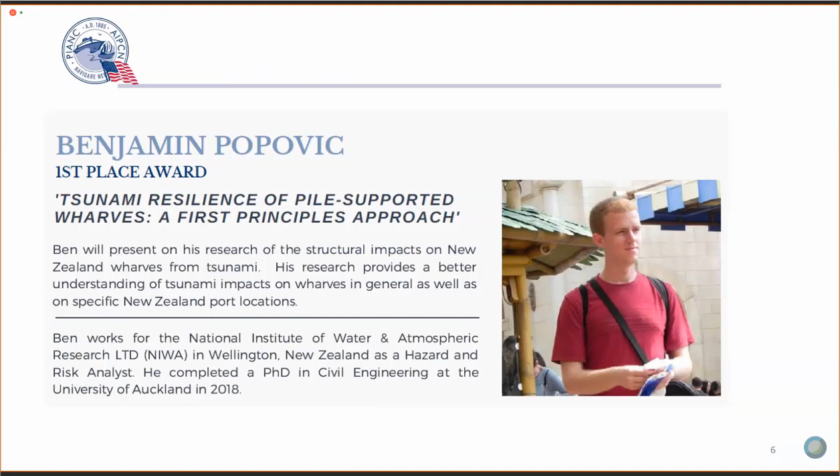And so we'll get the first presenter going here, Mr. Benjamin Popovic. He's currently living in New Zealand, but is originally from New Jersey, so we're claiming him as an American for this - New Zealand may want to claim him too. Ben works for the National Institute of Water and Atmospheric Research in Wellington, New Zealand as a hazard and risk analyst, and he completed a PhD in civil engineering at the University of Auckland in 2018. He will present on tsunami resilience of piers.

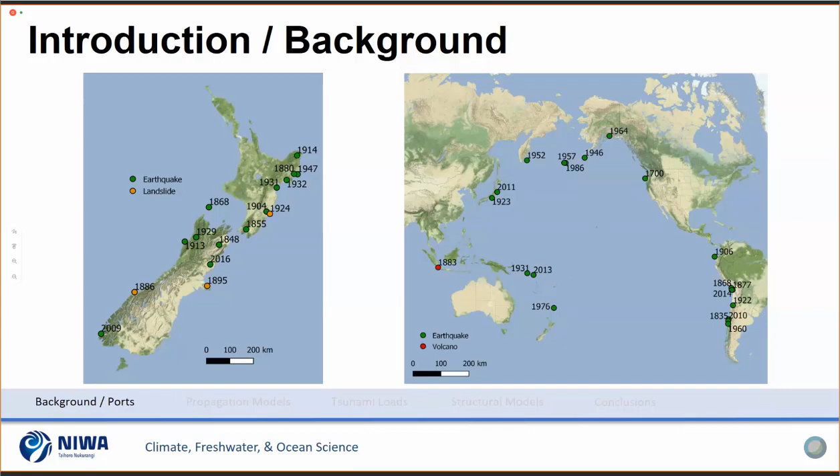This work was carried out in a number of different phases, and they can really be categorized into two pipelines. The first pipeline focuses on the tsunami hazards themselves, meaning a series of hydrodynamic modeling meant to come up with potential wave amplitudes and current velocities and whatnot specifically at the port locations. That information translates into loading characteristics, both in terms of magnitudes and time series that they would be applied to infrastructure over.

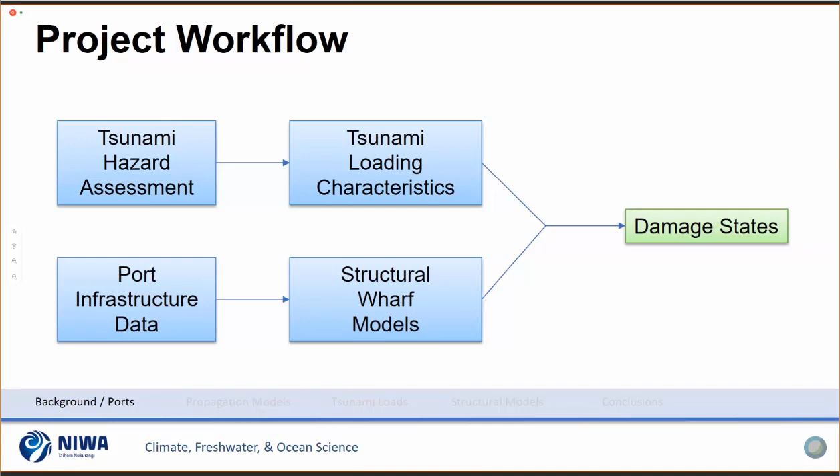The second pipeline relates to the infrastructure itself, meaning collecting as much data as we can on what sorts of structures currently exist at the ports. Sometimes that information is quite sparse because some of the infrastructure dates back quite a ways and is quite old on some sites. Then from the data collected from the ports, we developed structural models, and the tsunami loading characteristics were applied to those structural models, and we came up with predictive damage states for such events. I'll talk a little bit more about each of those different phases later on.

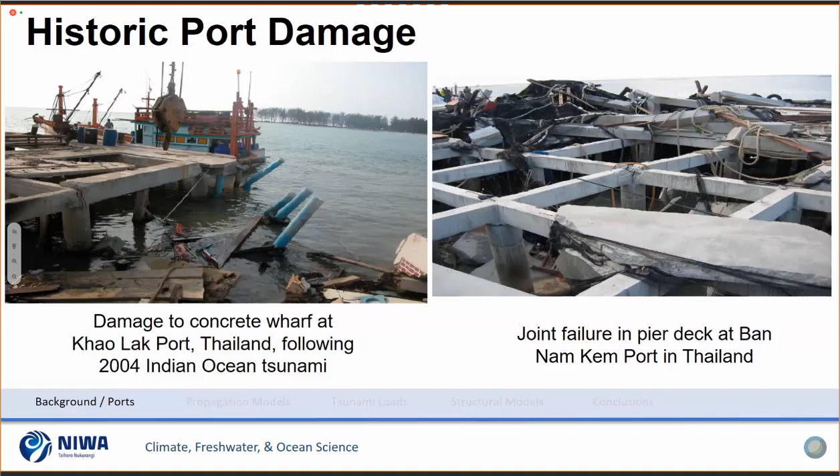I should point out Thailand is obviously a very different country than New Zealand, Japan, or the United States. Structural design standards in different countries are going to be very different, so we'd expect structures to respond quite differently depending on the country. But it's still useful to look overseas when that's the only data available, to gain some indicative idea of the modes of damage we'd expect to see in these sorts of events.

The port is built on reclamations that date back, in some cases, over a century. It's interesting because it's not just the port that's built on the reclamations, it's actually the entire downtown area of the city. If you look at maps of Wellington that date back to the 1800s, basically everything is underwater.

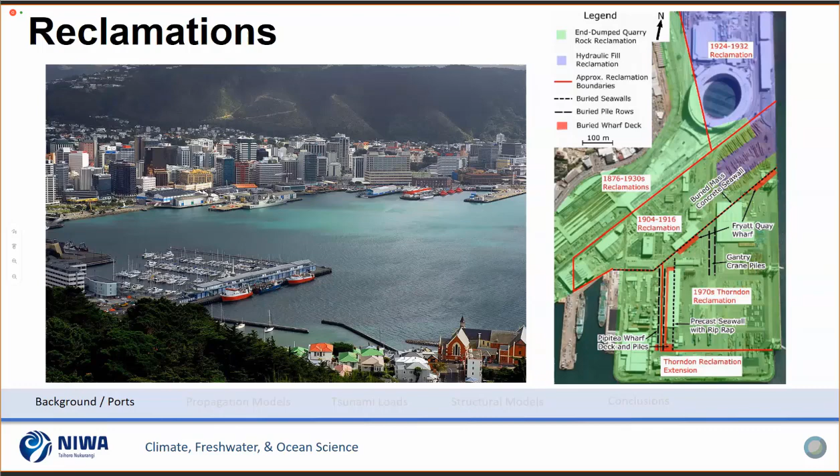And now everything is built up with skyscrapers and whatnot. And that has led to issues in hazard events in the past.

So in 2016, there was a major earthquake, about a 7.8 moment magnitude earthquake on the northern end of the South Island in a town called Kaikoura. And Wellington isn't that far away from that by distance. The earthquake caused settlements of the soil right behind the wharves, and that land dropped by between 2/3 of a meter and a meter, so about 3 feet, behind the wharves.

And although this is earthquakes, tsunamis can also do a lot of damage to the soil because of the turbulent nature of the tsunamis. So if it's not compacted well, you could see similar damage from tsunamis as well as from earthquakes. So that's certainly an issue that New Zealand may face in the future with the reclaimed land.

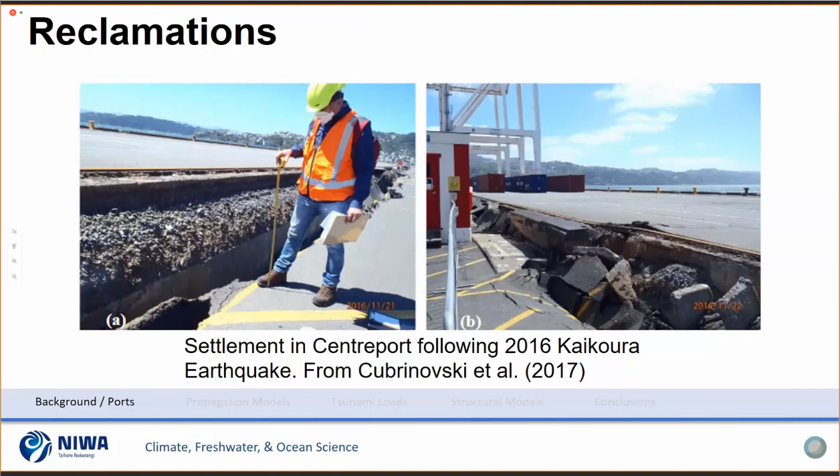So what do we know about tsunamis in New Zealand? This is really focused specifically on New Zealand. There have been a number of national tsunami assessments that have been done, but like in other places, national assessments are usually done on a very coarse scale. For New Zealand, the most recent national tsunami assessment was done back in 2013, at least the major one. And the issue with that is that tsunamis were modeled on 20-kilometer intervals along the coastline.

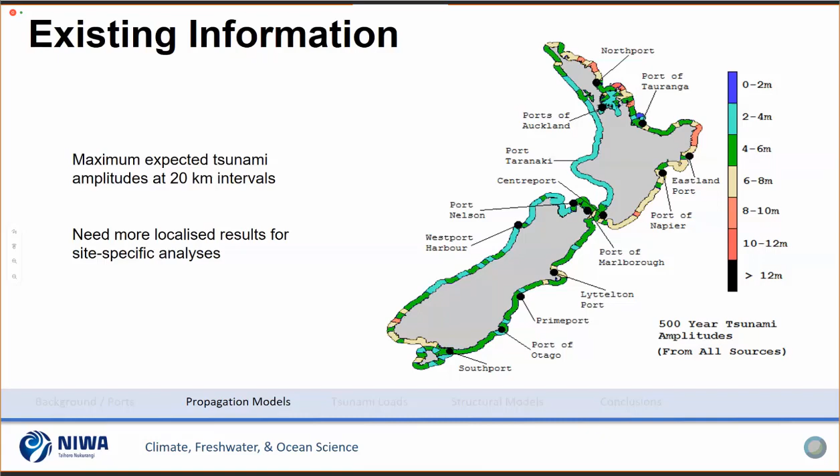And obviously that's not a lot of use if you're looking at hazards directly inside of the ports, because chances are that the ports may not lie at the point of that maxima if it's only occurring within a window of 20 kilometers along the coastline. So in order to assess tsunamis within the ports, we need much more site-specific results that are focused on specific lengths of coastline. And that led to a series of running hydrodynamic propagation models.

So a propagation model is basically a model that predicts wave heights and current speeds at locations along the coast. And they can be based on a number of different inputs. In this case, we were looking at subduction zone earthquakes, but propagation models can take inputs from fault line earthquakes or from landslides or just about anything that can produce a tsunami.

And in order to run these hydrodynamic models, you need very good bathymetric data for the coastline you're looking at, and you need some sort of source model. Again, in this case, we're looking at subduction zone earthquakes, but it could be other things. These were run using a program called COMMIT, which is the Community Modeling Interface for Tsunami, developed by NOAA in the U.S.

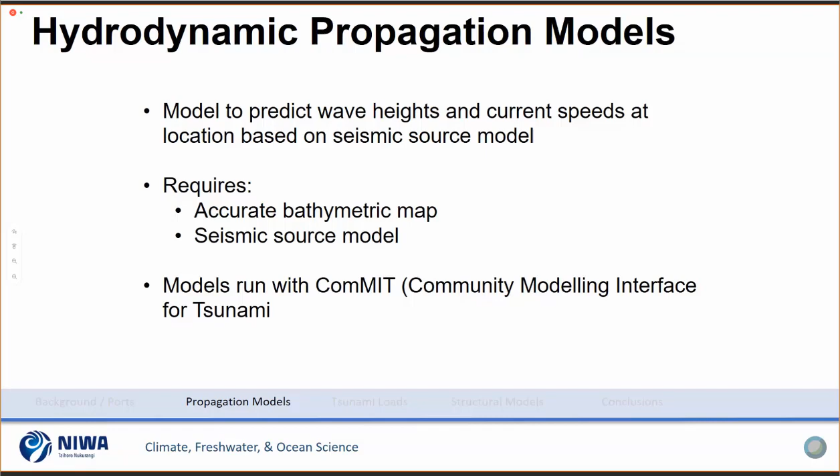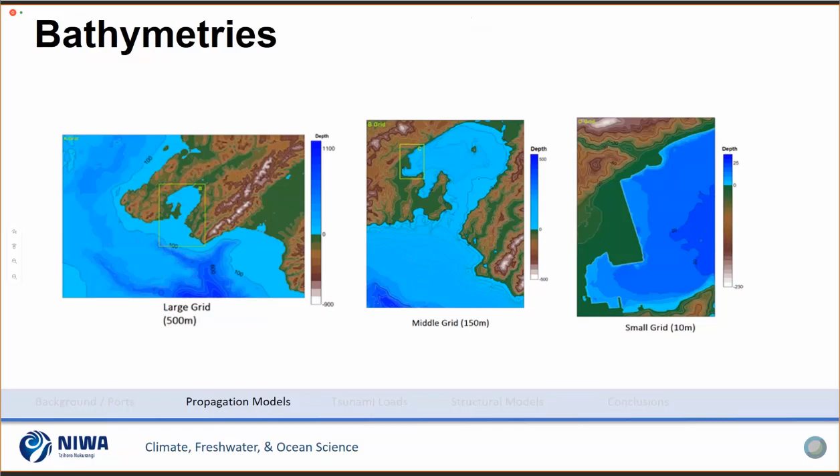So we developed bathymetric maps for each of those 13 ports. This is, again, Centreport in Wellington. All the data for that came from an organization in New Zealand called LINZ, Land Information New Zealand, which is responsible for maintaining topographic and bathymetric data sets. And those bathymetry grids were built on 10-meter grids, at least at the locations of the ports, so it's quite fine in terms of resolution once you get into the actual site.

And in terms of source models, we modeled earthquakes from 3 different local source locations and 3 different distant source locations. The local sources reflect the major subduction zones around New Zealand, which are the Kermadec Trench, just to the north of New Zealand, the Hikurangi Trench, probably the biggest threat to New Zealand, lying just off the eastern coastline of the North Island, and the Puysegur subduction zone, which is a bit smaller, down south of the South Island.

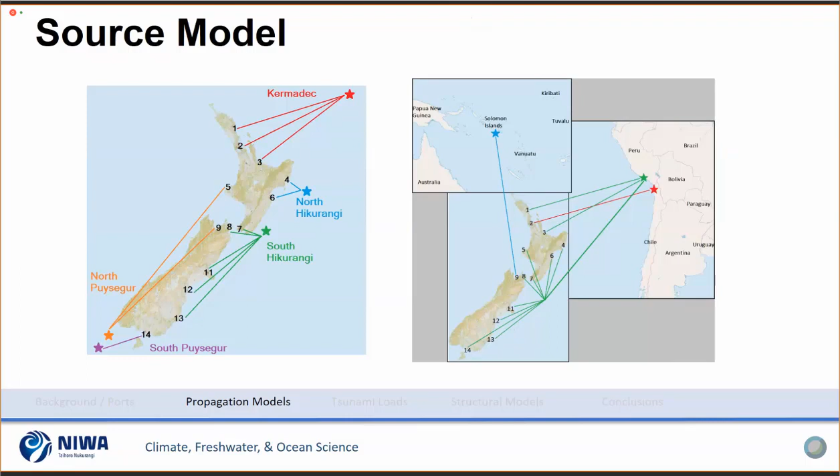And then in terms of the distant source tsunamis, we modeled 3 locations as well, from the Solomon Islands, from Peru, and from Chile.

So the outputs of those propagation models are maximum water levels for each of the sites, inside each of those grids for each of those ports.

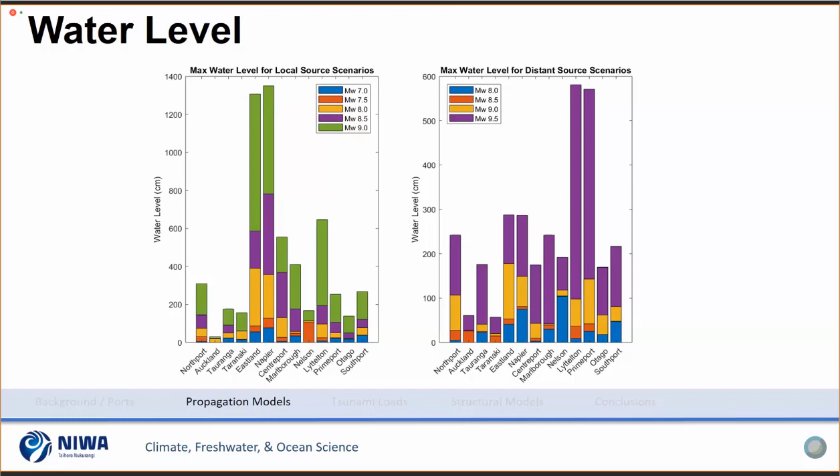There are certainly sites that are more exposed to tsunamis than others, and none of this really comes as a surprise from a New Zealand context, because there are so many subduction zones surrounding the Pacific Ocean. It's long been known that the east coast of New Zealand is particularly exposed to tsunamis, and the same kind of exposure would probably relate, without having modeled it, to the western coastline of the United States, just because there are so many major and active subduction zones surrounding the Pacific that can generate distant source tsunamis that really do a lot of damage to the coastlines where they hit.

And the same thing applies for current speeds. The ports that are potentially exposed to very high current speeds are mostly the same as those exposed to very large tsunamis, though not in all cases. It's worth pointing out that current speeds and wave amplitudes can even exclusively, in the absence of the other one, do quite a bit of damage inside of the ports.

So even if you don't have a necessarily tall tsunami, it can still do quite a lot of damage if the currents are moving very quickly.

Just an example of what one of those final grids looks like. This is for Northport, where the fuel refinery is. Those plots on the left are showing the maximum wave amplitudes across the entire grid surrounding Northport and the maximum current speed surrounding that port. You can see in the images on the right.

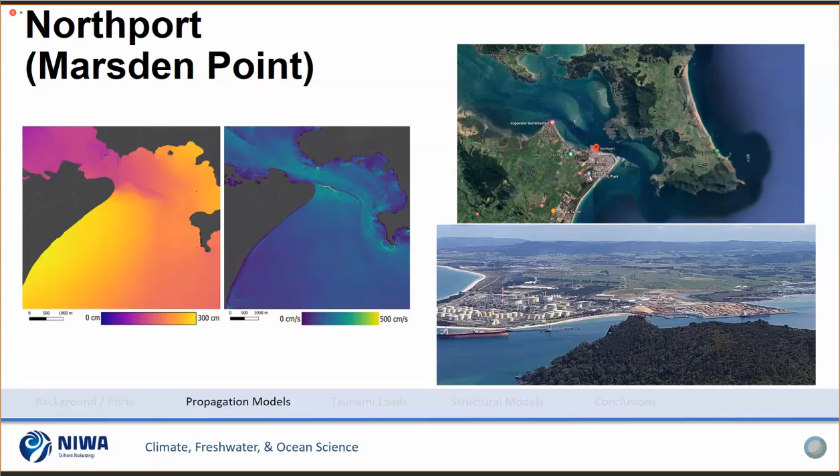The top one is just an overview of where Northport is at the entrance to what we call Whangarei Harbor, that's that inlet there. On the bottom, you can see that's taken from the mountain across the entrance to the harbor. You can see the port off to the right side, and then the refinery that it services on the left side, sitting right on the edge of that peninsula.

So the second phase of work surrounded determining magnitudes and modes of tsunami loading. Tsunami loading is a bit complex, and it's usually broken down into a number of different parameters, categorized as horizontal and vertical loads.

The horizontal can include things like wave slam, surge forces, hydrodynamic loads, hydrostatic loads. And the vertical loads can include things like buoyancy, gravity loads, if you're talking about a flat surface, and uplift, and hydrodynamic uplift.

Especially recently, there have been some design standards that have started taking into account tsunami loading and providing design equations and whatnot, particularly some design standards published by organizations like FEMA. More recently, the most recent revision of ASCE 7 also included a section on tsunami loading and tsunami design.

And the one component of that loading that's often left out, because it only applies to certain types of structures, is really the hydrodynamic uplift.

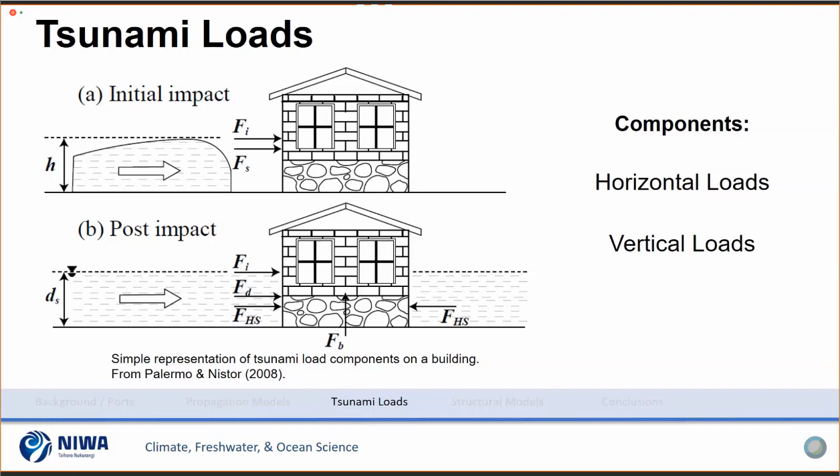In fact, to quantify that particular type of loading, there was actually a long series of physical modeling carried out at the University of Auckland's Fluid Mechanics Laboratory. They have quite long flumes, up to like 30 meters or something like that, where there was a series of testing done on specifically pile-supported wharf-type structures, scale model structures.

So we came up with load magnitudes, and then those load magnitudes were developed into time series that were ultimately applied to structural models that we created based on data we got from the ports. I'll talk about those structural models in just a second.

So the time series consisted of two phases, basically an initial impact phase and then a steady state hydrodynamic phase that were applied to the structural models, to each pile in the structural models.

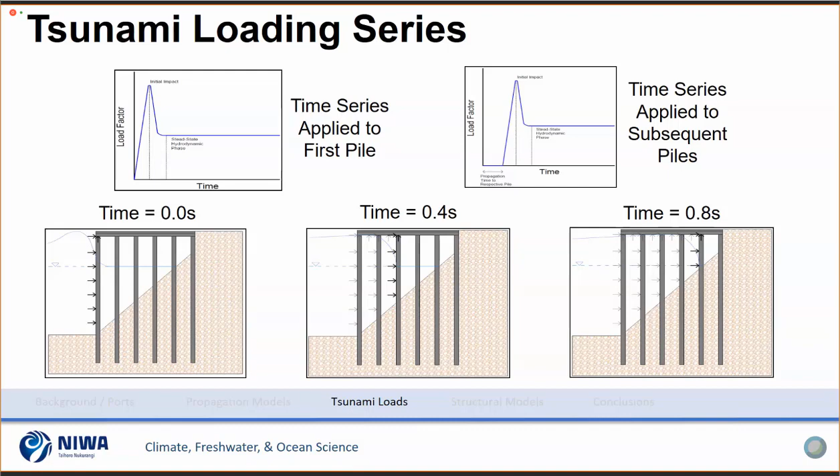So the second kind of pipeline of work that we undertook was developing structural wharf models. These were based on data that we got specifically from the port companies. One thing to point out is that there are 14 port companies in New Zealand, and they're privately owned, and they're also highly competitive.

So the data that they release is subject to commercial sensitivity. Rather than modeling any specific wharf, all the data that was collected was kind of aggregated into generalized models. Those were modeled for three different time periods: pre-1963, 1963 to 1989, and 1989 to present. The distinction between those time periods is that's when there were major revisions to New Zealand's concrete and reinforcing steel structural design standards.

Obviously, there were a lot of different characteristics that went into the development of the wharf models - that would be something that I could probably do an entire talk on, to be quite honest. But we modeled things like different soil types, different grades of steel reinforcement, different shapes and sizes and dimensions of piles, et cetera, et cetera.

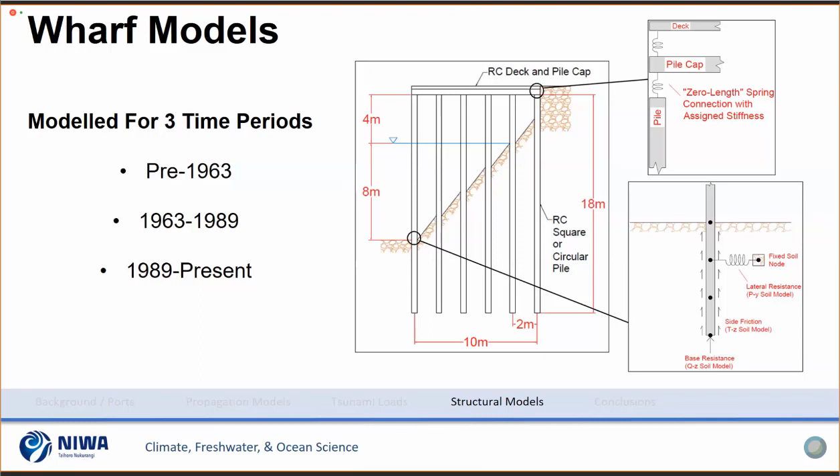And so the tsunami loading characteristics were ultimately applied to those wharf models that we generated, and we came up with element damage states for each of those structures, for each of those unique tsunami scenarios. The element damage states were applied to each element inside of those structural models.

In order to keep things relatively general and not introduce too much over-certainty into this modeling process, we just developed 4 damage states, and they're quite broad: elastic, if there's no sustained damage to that element; cracking, when the concrete begins to crack on that particular element; and then 2 higher damage states that relate to the reinforcement, yielding and fracture.

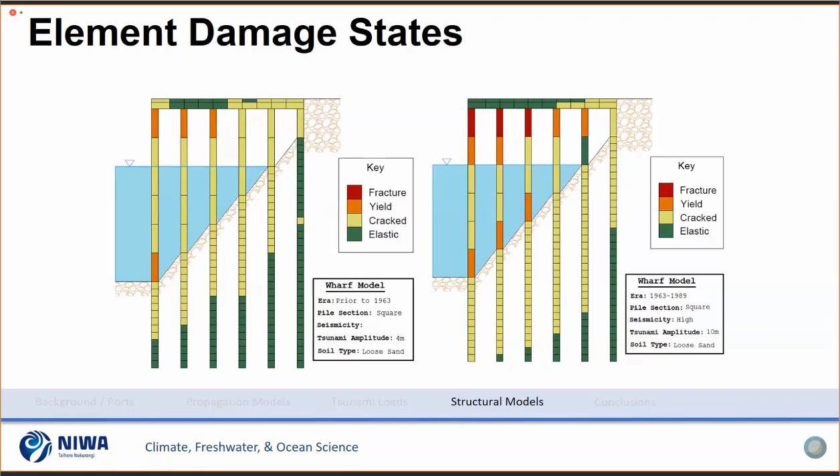After those element damage states were applied to the structures, all of that data was aggregated into damage states that describe the damage to the entire structure itself. So that would be no damage to begin with, and then concrete cracking related to the wave height of the tsunami, and then potential yielding and fracture of the reinforcement inside, up to potential fracture of the pile. That data was aggregated and pulled together for each different structural model that we generated.

So this is one soil type, and it relates to all of the different time periods that we modeled, the different sizes and shapes of piles, and the yield strength low and high bit that relates to New Zealand's steel reinforcement design standards. There are two grades of steel used right now, I think it's 300 and 500 megapascals, and that's been consistent over time—they've just increased over time.

Just a couple of final thoughts before I close up. This assessment really focused in on wave amplitudes related to damage, in part because a lot of the design equations available really focus on wave amplitudes, although it's increasingly common to see current speeds and velocities also incorporated into those equations. But obviously the currents also have the potential to affect structural performance, and especially it can depend on the harbor's natural frequency and whether there's wave excitation taking place.

There are certain ports that do tend to see effects like that. And second, there's great difficulty in determining ARIs for tsunamis, especially because they're linked to source events that also have ARIs and AEPs associated with them. So it can be highly speculative as to how often and common certain events will occur and certain damage will occur.

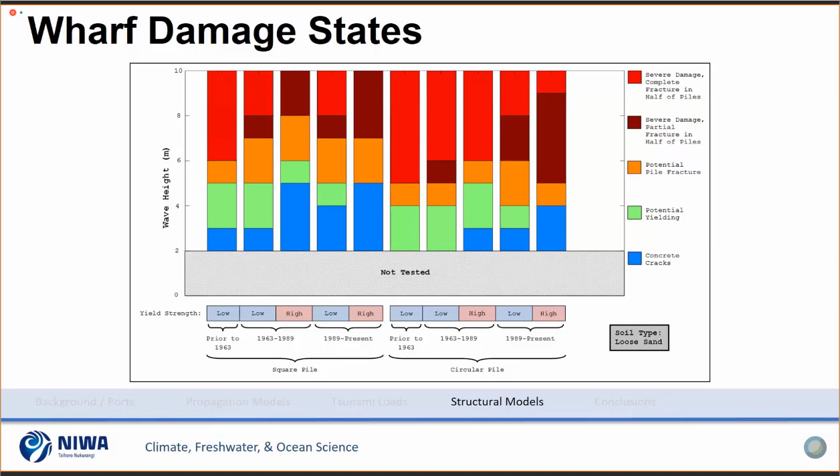In general, the earlier wharves, specifically because the grades of steel used were much lower, generally performed worse than the later ones. There's a bit of back and forth because I'm trying to go back, but in general those structures did perform quite a bit worse than the structures of today. I guess one of the things is that as the steel's gotten stronger, it's also gotten a bit more stiff, and if it's applied to hazards that kind of feed on a lack of flexibility, that can potentially have impacts for the structures as well.

Got it. Okay, and maybe last one. Could you elaborate on the model testing that you used? This particular person, you may want to know that we use the pneumatic tsunami generator at Wallingford, so I'm cautious of testing using waves that are far too short. So we tested in terms -- this is in terms of the physical modeling, I guess, correct? That's the way I'm interpreting it. I'm guessing that's what it is.

So we actually did this study. I didn't go into too much detail on the physical modeling side of things -- that's also quite a long series of work. But that was done in a couple of different ways. We did it in two different flumes. In the first one we generated solitary waves, and in the second we generated what was kind of analogous to a dam break type bore. That was the one ultimately used to quantify the uplift loading, because that's a bit more representative of what you'd actually expect to see in terms of tsunamis. The solitary waves tended to understate the magnitude of the uplift loads, but it was the bore type, rather than a sinusoidal wave type, that was used to quantify that -- in a dry bed where a hydraulic gate was raised very quickly to create a bore.

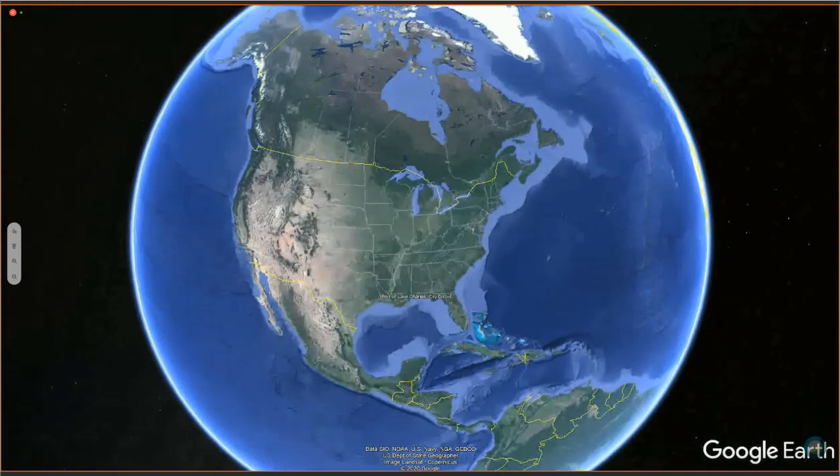So to situate everyone who may not be familiar with the geography of Louisiana, Louisiana is in the southeast United States, and Lake Charles is in the western part, quite near the Texas border. Lake Charles is located on the Calcasieu Ship Channel that comes in from the Gulf of Mexico, about 30 miles inland.

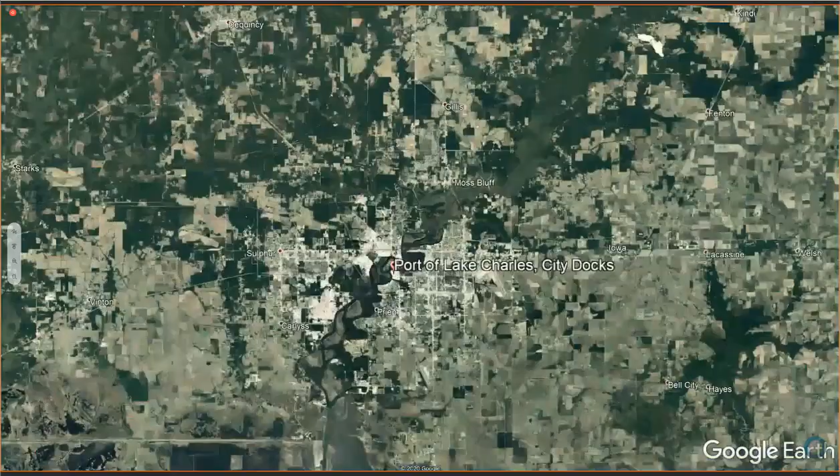Port of Lake Charles has several facilities, 2 bulk terminals, and what we're showing here is its largest facility, City Docks, which is a 200-acre facility. It's got 12 deep water berths and about 1.6 million square feet of covered shed space.

The project that we're looking at here, berths 4, 5, and 6, run north-south on the Calcasieu River, just a continuous timber wharf with a covered shed on top.

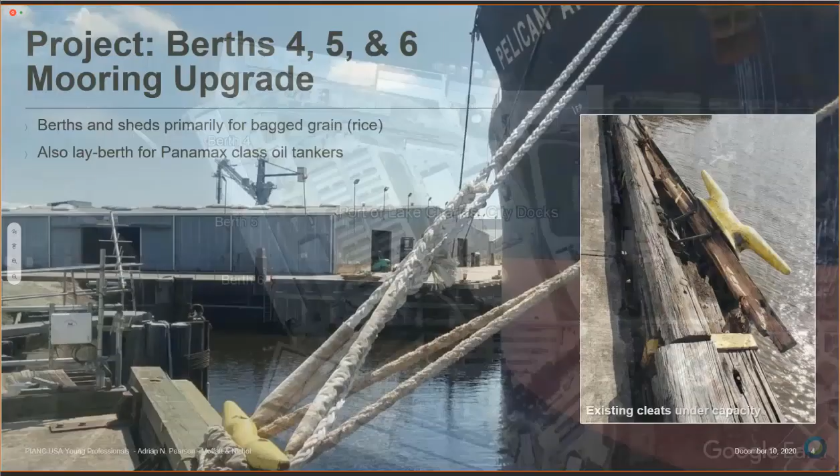So I want to speak a little bit more about this project in specific. Berths 4, 5, and 6, as I said, are timber wharves with sheds on top. These berths are primarily used for break bulk cargo, so palleted bags of rice or other types of grain. But it's also used as essentially a parking spot for oil tankers that are waiting for the liquid berths to open up nearby. So they see large Panamax class break bulk ships as well as oil tankers.

As you can see here, the primary mooring equipment are just cleats that are primarily designed for barges, but they're being used more and more often for these large tankers with stronger mooring lines. You can see in the photo the cleat has 3 lines tied to it, and the actual timber bull rail to which the cleat is connected is starting to pull away from the wharf deck slightly. On the right you can see the result of that more and more frequently is these cleats actually getting ripped out of the timber bull rail.

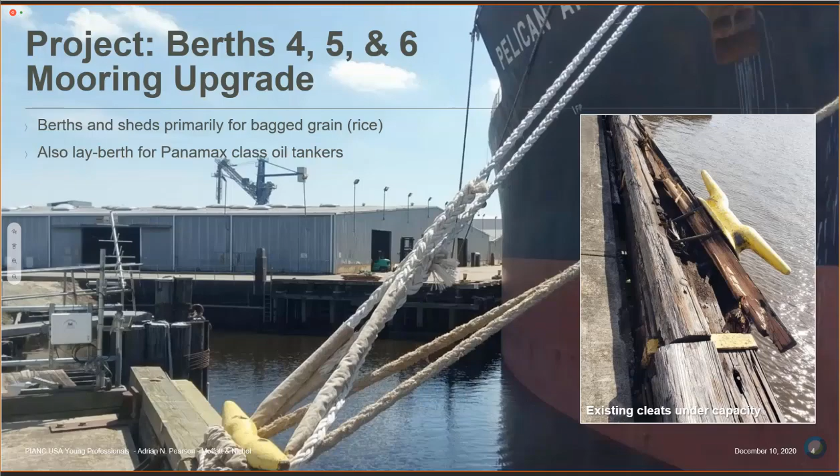So that was the motivation for the project at its birth, to upgrade the mooring equipment. And to do this, because a full wharf rebuild was not possible in the short term, we decided to install isolated mooring dolphins within the existing footprint of the structure to provide a strong mooring point and not to rely on the existing timber wharf to resist these large mooring loads.

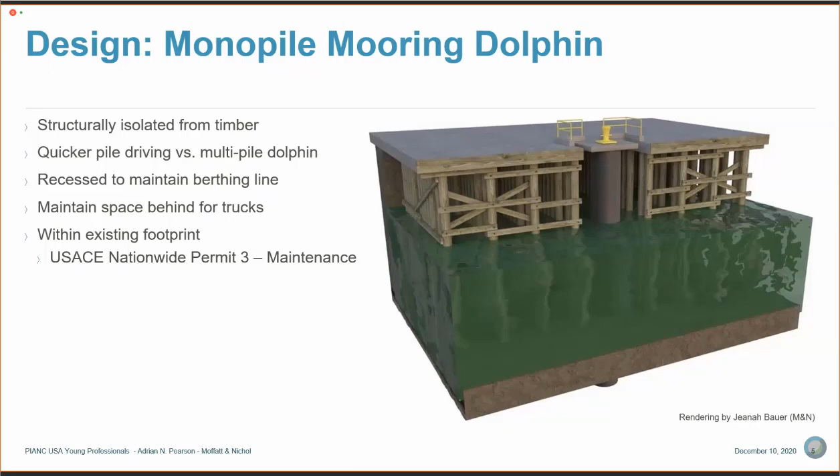I want to speak a little bit more now about the design of these mooring dolphins, and just to step back for a moment, what really governs the design of these dolphins is the mooring load that's applied to it. These ships often have mooring lines with very high minimum breaking loads that can exert very large lateral forces on these dolphins. So typically the mooring load governs the design of these dolphins.

When we go to calculate these loads for use in design, there's several different methods. One is you can run a numerical mooring analysis in software where you can model the berth structure, the ship, the mooring lines, and run all different conditions of wind, wave, current, and calculate how the system responds and what the tension is in each line. You can also run a scaled model in a laboratory where you can simulate the ship at berth and how it responds to different environmental conditions. And then you can also use simplified equations based on the number of lines, the geometry of the berth, to figure out what the total load is on your dolphin.

Before I move on to the specific project, when we approach the design of a mooring dolphin, whichever method we choose, we want to achieve the same ultimate design where we have a progression of strength from the ship to the dolphin, so that in the case of an overload, if something goes wrong at the terminal and the ship line experiences excessive tension, the last thing to happen is a cleat, bollard, or hook ripping out of the wharf deck, which could injure personnel or damage the ship. Also, if a bollard pulls out of a wharf, that berth may have some downtime in order to fix that and bring ships in for the next call.

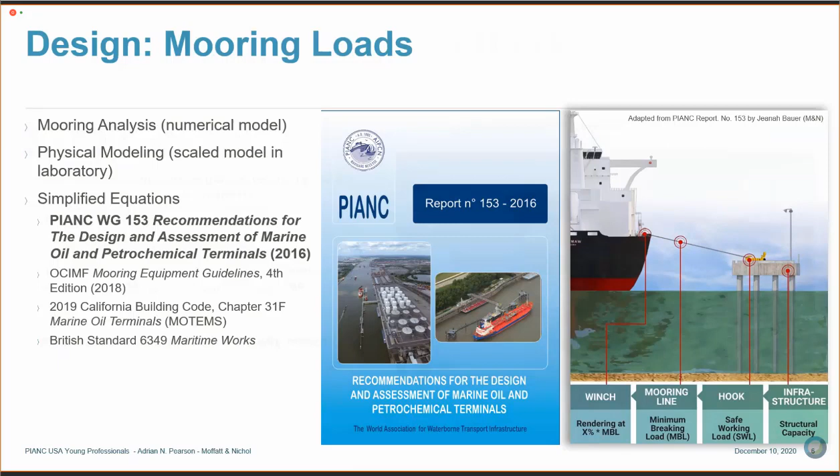So the goal is to design a system that is progressively stronger from the ship to the dolphin, and I'll speak about that a little bit more in the next slide. I'm going to focus here on the simplified equations versus the mooring analysis and look at how these loads compare in design. So to jump into the details,

The PIANC guideline that I showed before defines an equation that tells you, if you're designing a dolphin that has mooring equipment, be it bollard or hooks, the total horizontal load applied to the structure that you need to design for. This is a function of how many lines are tied to this mooring point. So in this photo on the right, you can see this has 2 hooks, 2 mooring lines. It's a function of what the safe working load of the hook is.

So if you have a 100-ton hook with 3 lines, you can calculate what the total load is. And then it's got a factor here on the majority of tankers. The lines on the ship side are wrapped around winches. And when there's a certain amount of tension applied, those winches will render and start to release the line. So there's a factor for that as well.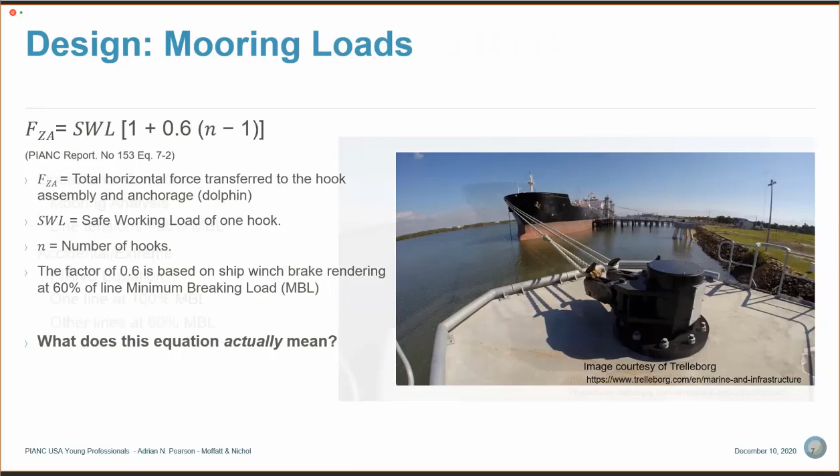I want to speak a little bit about what this equation means in the context of mooring analysis and the design of dolphins. So if we think about a ship at berth operating, say it's an oil tanker transferring cargo through marine loading arms, there are certain environmental conditions that are acceptable for operations. There are limits to how much the ship can move up and down, side to side, before it becomes unsafe to operate and transfer cargo.

And the same applies to limiting the amount of tension on each mooring line. So under certain design conditions, let's say the wind is blowing from right to left in that picture, pushing the vessel away from the berth, that may generate high line tensions. At a certain wind limit, the tensions in the line become excessive. And the industry standard for mooring lines is to limit that tension for operational conditions to less than 55% of the minimum breaking load of the line. That's what we've typically set as an operating limit for a terminal.

Now, when we look at what the PIANC equation says, if you look at the factors, the 1 and 0.6, what it's saying is that on a single mooring point, one line is tensioned all the way to 100% of its minimum breaking load, so it's at its maximum tension at which the line may actually start to part or break. And then all the other lines tied to that mooring point are tensioned to 60% MBL. So that represents an accidental and extreme, very conservative scenario as far as how much load a dolphin could see in its service life.

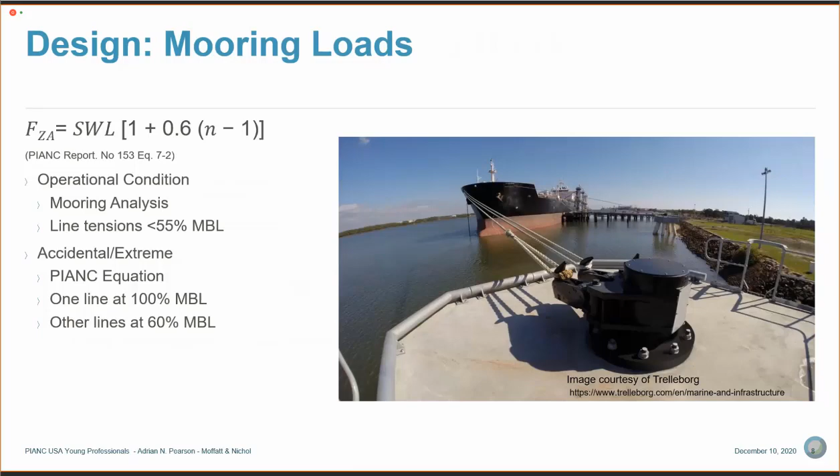Whereas the operational limits that we set for the operation of the berth, the loads are significantly less. And I want to spend a little bit of time to compare these two in practice. When we look at berths 4, 5, and 6, and the typical mooring arrangement, this is a berth 4 with a Panamax class tanker tied up.

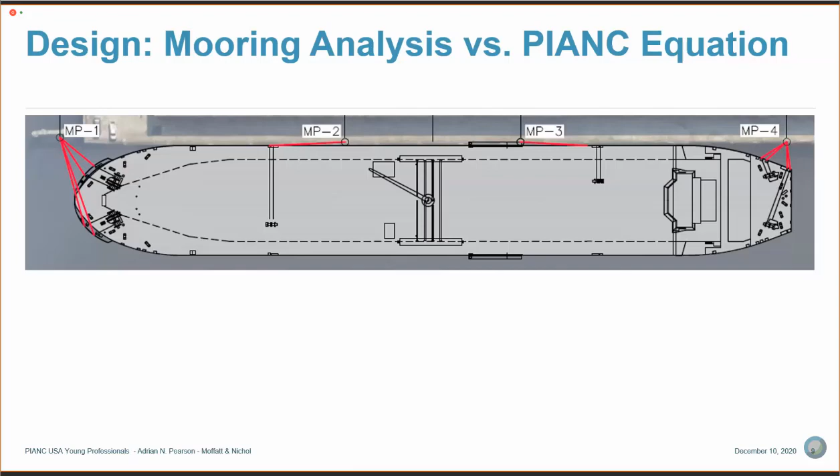You can see the mooring points are labeled MP1 through MP4. MP1 and MP4 each have 4 head and stern lines secured to that one mooring point. MP2 and MP3 both take the spring lines, which is 2 lines each. And when we look, I'm going to pull up the table of results here and walk you through it.

When we run the mooring analysis, which again is looking at wind, wave, and current conditions from different angles and calculating what the actual line tensions are in each of these red mooring lines, we can focus here on the first row, MP1 and MP4. You can see it's got 4 lines each. The minimum breaking load is 205 kips.

That's about 93 metric tons for those who aren't familiar with kips. And when we look at the mooring analysis results, the maximum line tension for MP1 or MP4, we have one line at 54% of its minimum breaking load, and then lines lower at about 48, 26, and 20%. So one line is tensioned up to the operating limit, and all the other lines tied to that same dolphin are slightly less; they don't have as much tension. And when we sum those loads up, we get 303 kips applied to a single dolphin as our load.

And that's a load that I would consider a service load, an ASD load, something that this structure could actually see during its service life.

Now I want to compare that to the load we calculate using the PIANC equation. If we look at the number of lines, the minimum breaking load, and apply the PIANC calculation, we get a load of 573 kips, which is significantly higher. Now, if we take the service load from mooring analysis and factor it up by a typical load factor of 1.6, we get 485 kips, which is still significantly less than the PIANC load.

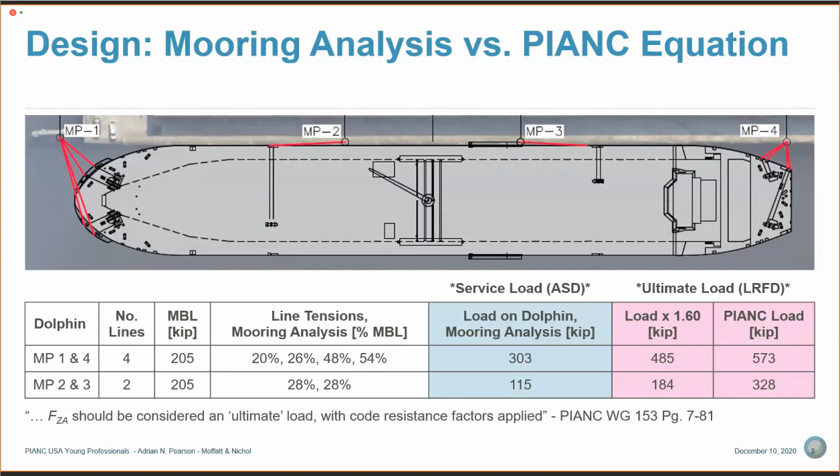That's what I'm going to speak about next: how we take these loads and apply them in the design of a monopile, and look at what the implications are of applying the service or ultimate load.

Typical mooring analysis software used for single laterally loaded piles, L-pile, was used for this project, and its default is to use allowable stress design with service loads. These diagrams on the right show the 303 kip service load from mooring analysis, and the 573 kip load from the PIANC equation. You can see the PIANC load gives roughly double the bending moment in the pipe pile.

If we carry that through to design, the table on the left shows we can get a 72-inch diameter, 2-inch wall thickness pipe pile to work in this case, giving a total weight of about 125 short tons. If we apply the PIANC load, it requires a significantly larger pile, 90-inch diameter, 2.5-inch wall, and the weight increases by about 70 tons of steel, which is significant.

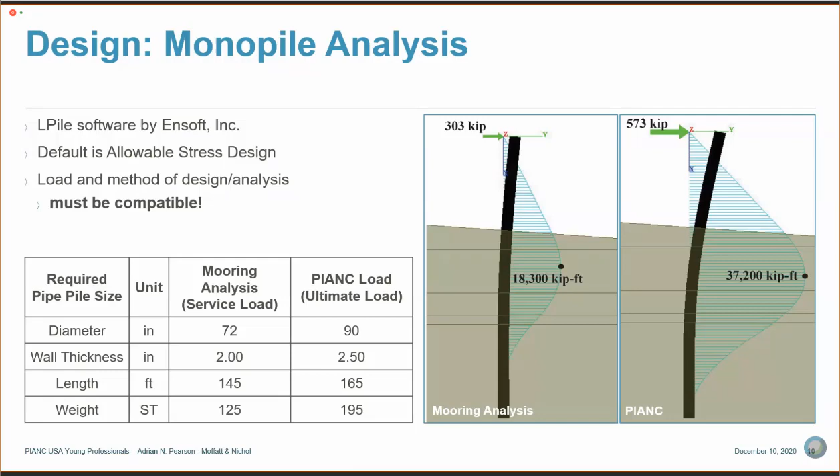I want to emphasize that the load you apply needs to be compatible with your method of design. In this case, the PIANC load is an ultimate load, and we need to figure out a way to carry that into an allowable stress design in a compatible way. In this project, we looked at two different ways to approach this, to achieve a design load that's compatible with our method of analysis.

The first is to reduce that ultimate PIANC load to an equivalent service load, or ASD load. Take the PIANC load calculated with the equation and reduce it down to a service load. Method two is to take the full PIANC load, apply it in design, but permit an increase in allowable stress above the typical 60% yield stress specified in many building codes.

So I'm going to speak first about method number one. We take the full PIANC load, which was 573 kips, and reduce it by a factor of 1.60, which is a standard load factor for LRFD specified in the Unified Facilities Criteria, Design: Piers and Wharves, the California Building Code, and several other U.S.-based codes. That's the first method, reducing the ultimate load to an equivalent service load.

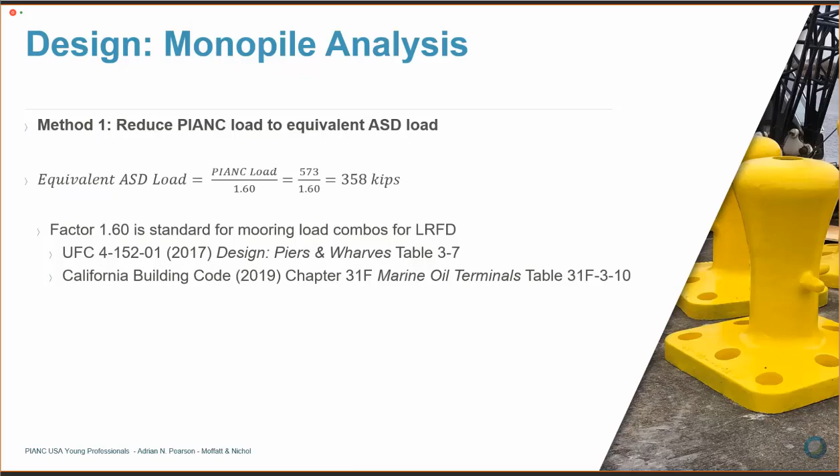Here we get 358 kips. I'll note that reducing this load by a factor of 1.6 still gives a result greater than the 303 kip load we calculated from mooring analysis.

Method two: we take the full PIANC load and apply it in design, but permit a 1/3 increase in allowable stress. This is in the provisions of the American Petroleum Institute practice for fixed offshore structures, where they allow a 1/3 stress increase. I'll note that this used to be permitted by ASCE and the Steel Construction Manual. It's been phased out of these codes, but it's still permitted in certain circumstances. The paper I'll list below has useful context on how this stress increase has evolved over the years. But I want to emphasize that these two methods can't be applied at the same time.

If you take a reduction in the load using method one, you've got to stick to the allowable stresses specified in the code. Conversely, if you allow an increase in allowable stress, you can't reduce the load as well. So you can't double dip, essentially.

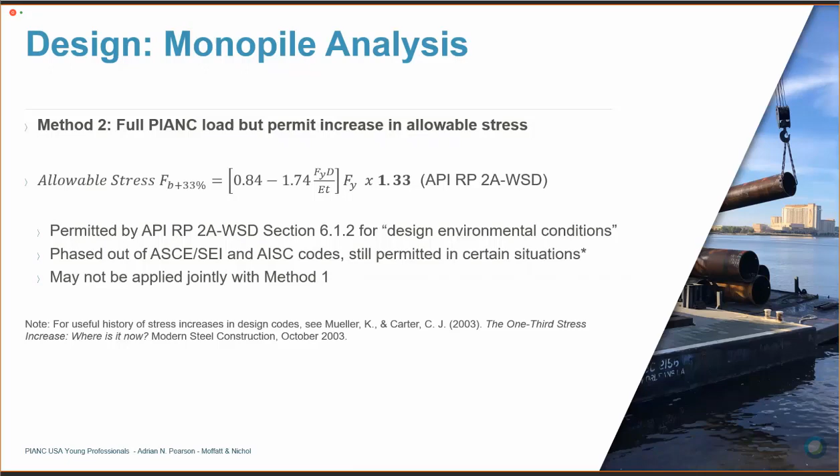So let's look at how these two methods compare for the 72-inch pile we ended up going with on this project. With method one, where we reduced that PIANC load to an equivalent ASD load, we get 358 kips and acceptable stresses. We have a demand capacity ratio of 95% relative to the allowable stress in the steel, which is 60% yield, and we get a pile that's about 101 short tons.

Now, for the same size pile, we hold the PIANC load at 573 but permit an increase in allowable stress. This still results in excessive bending stress, with a DCR of 120%, and a pile weight that's much larger because the tip elevation needs to drive down further to get geotechnical stability. So even with the increase in allowable stress, it still doesn't work.

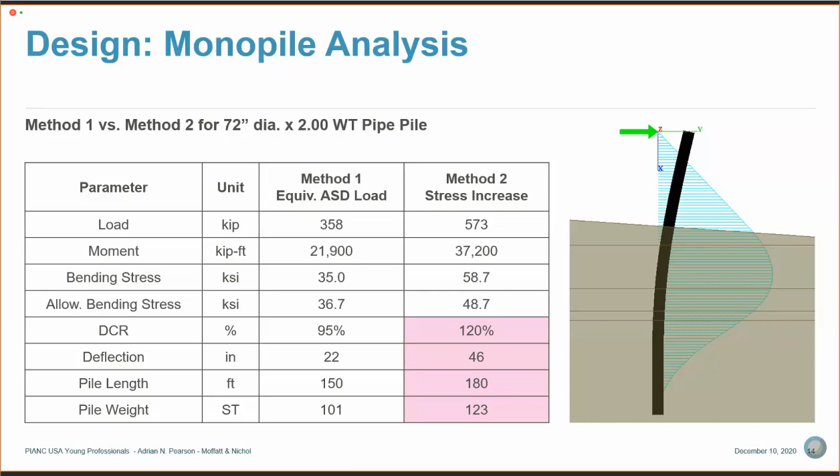Method two would require a larger pile. So for this specific project, we recommended going with method one, reducing the PIANC load to an equivalent service load. It gives you a load that's compatible with your design, it's still very conservative compared to the service loads we calculate in the numerical model, and it gives deflections we can rely on for design. With method two, we did not choose the ultimate load from PIANC - it doesn't really sync up with the ASD analysis, requires a much larger pile, and the deflections are not as reliable because it's an ultimate load.

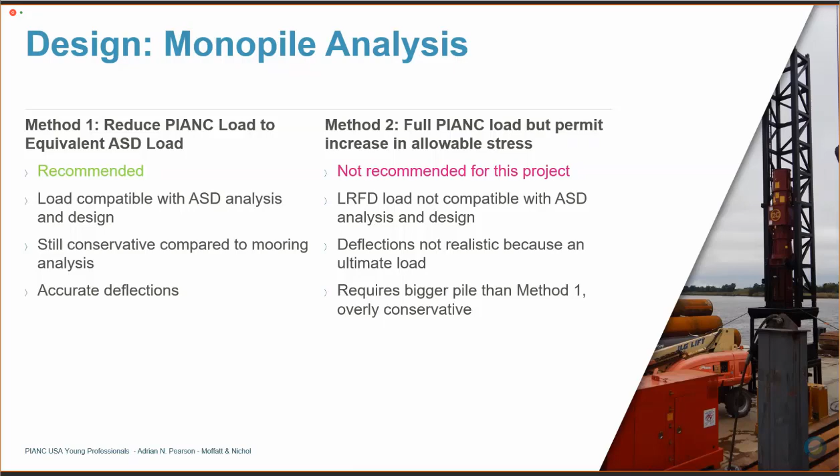So I know we're pushing up on our hour time slot here, but I want to get to the fun stuff and talk about construction.

In reality, rather than having a continuous section of steel that's 2 inches thick, for this project you really only need the thickest steel in the high moment areas, so we were able to taper down the wall thicknesses on top and bottom of the pile to reduce weight. The Dolphin top hat, which was one of my favorite engineering terms, is the concrete pile plug on top into which the anchor bolts for the bollard are cast.

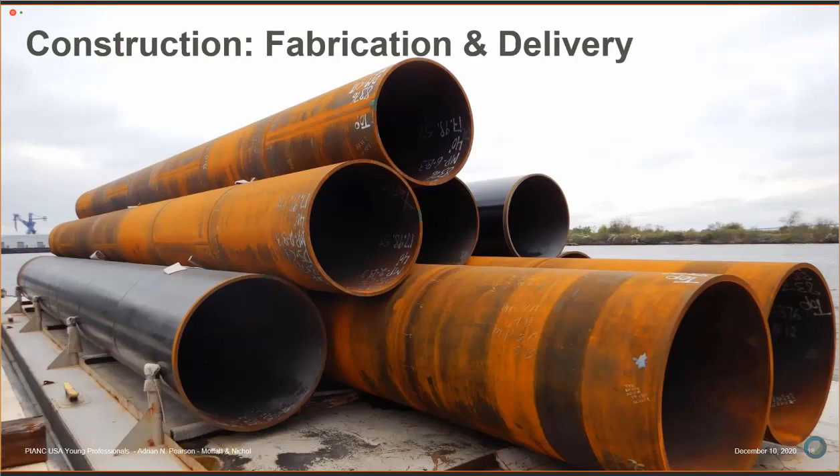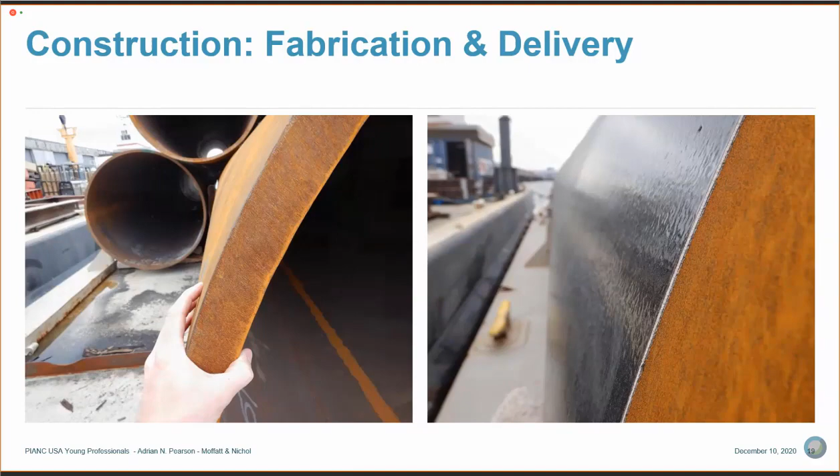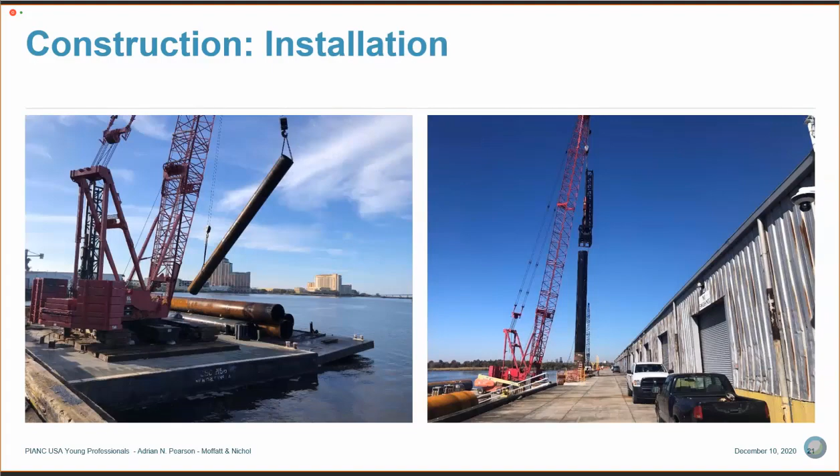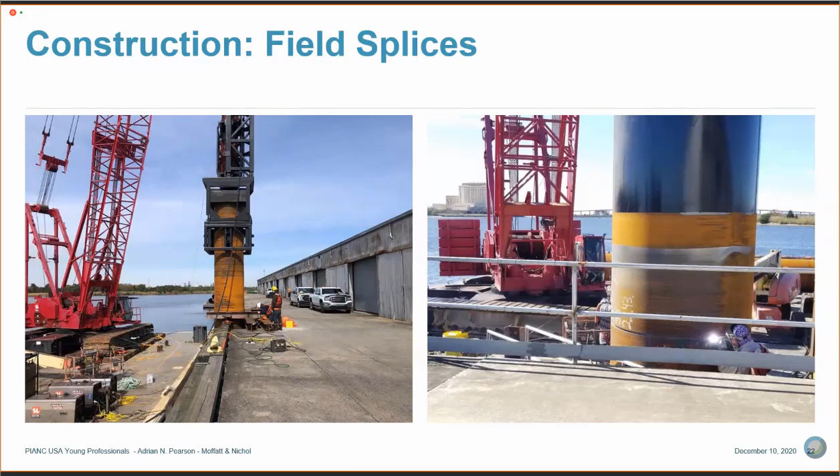And on the right, you can see the precision with which the coating is applied. Here you can see they're cutting out the holes for the monopiles to fit in the existing wharf deck. You can see the contractor swinging the piles into place and readying the pile driving hammer. They drive one of the lower sections down to about deck elevation, then swing in the upper section and perform a field splice - you can see a welder on the right splicing the two together. Then they put the hammer back on and continue driving down to its final elevation.

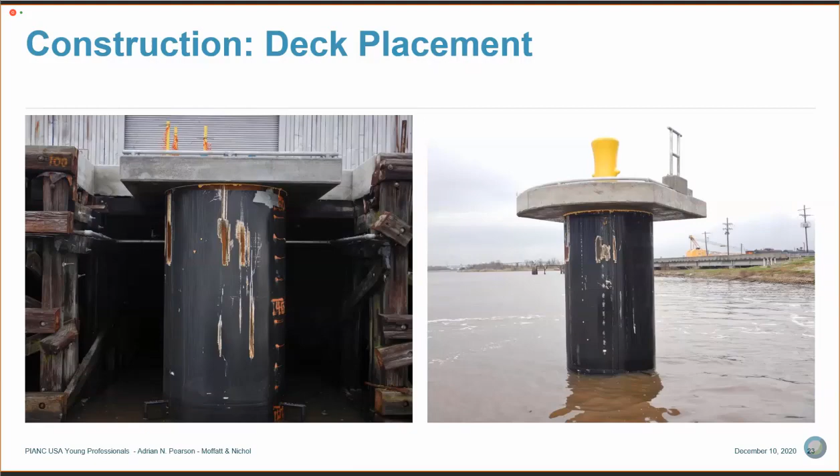And in the end, we went from having these 54-inch mooring cleats that were undersized for the vessels at this terminal, to a structurally isolated monopile Dolphin with a high-capacity bollard on top that's allowed the port to bring in these larger ships in a safer manner.

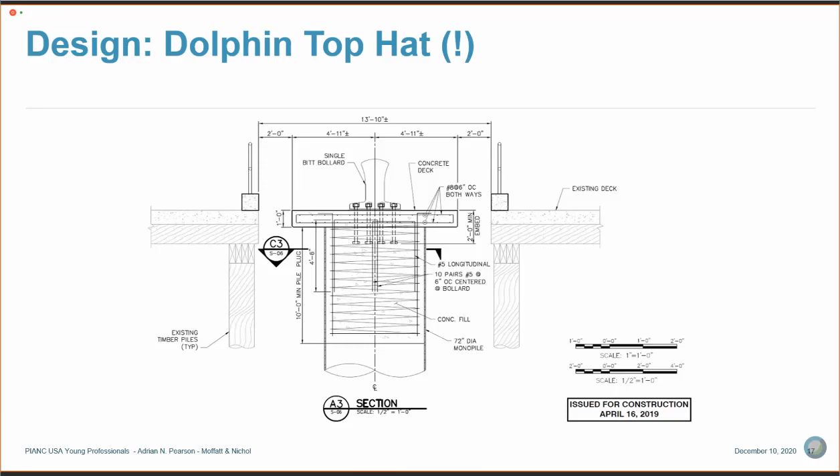There was a follow-up question. I think the photo at the end had an optical illusion that made that gap seem much smaller than 2 feet, but it was built with a 2-foot gap. Yeah, someone noted that right earlier. The gap is here on the left, and on the back side, because the monopile doesn't move back, it's essentially just butted up against the existing wharf. Got it, thanks.

And then, a question regarding method 1: can you speak to the use of unified facility criteria load factors versus ASCE 7 load factors and reducing the ultimate calculated load per working group 153? Yeah, that's a good question. I think that's a very good question.

So in UFC, the load combinations specifically have a line item for mooring loads applied to a dolphin, and they've got the factors for ASD of 1.0 and a load factor of 1.6 for LRFD. So you can approach it from that angle, looking at the actual mooring loads. Whereas in ASCE 7, because it's not specifically written for structures of this type, the argument is more from the perspective of what drives the mooring loads - for example, the wind load, current load, or wave loads that actually move the vessel, the ship itself, and drive those mooring line tensions.

So I think the argument can be made from both sides. I think the argument is a little easier and more clear to make from the UFC perspective, but I think an equally valid argument could be made by taking a reduction based on wind loads applied to the vessel that generate line tensions. So both are valid - it just depends on which argument you want to make with whoever is reviewing the calculations.

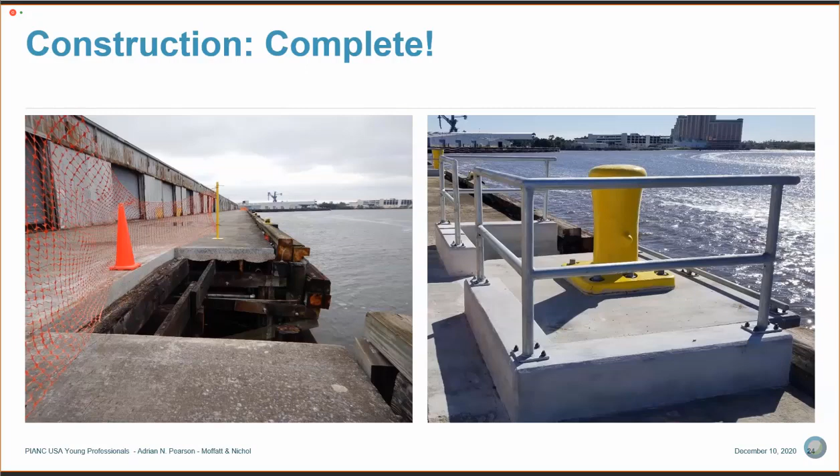The question is: did you have any issues rolling 2-inch thick plate in the pipe pile? Part 2, what method was used to roll it, and was there a specific reason for the site welding of the splices?

All very good questions. The first one, for 2-inch thick plate, that was no problem for the pipe pile manufacturer in Houston - I think they can roll up to 3-inch thick plate. The pipe steel is manufactured in flat plates. You can see here these 10-foot sections, they call them cans. So it's flat plate, 2 inches thick, they roll them in the shop and do a longitudinal seam. So they roll them up essentially into 10-foot cans - it looks like a Coke can. Then they splice them together in the shop.

The reason we had field splices is because, you can see here in pretty small text, each of these two sections - there's 2 sections spliced together in the field. One of them weighs about 42 tons and the other one's 56 tons, and the piles were quite long. So it was difficult to transport as one piece, and also difficult for the contractor to swing them up into place, to get the leads of their crane high enough to pull the pile up in one piece. So it was easier for the contractor to drive it broken into 2 pieces.

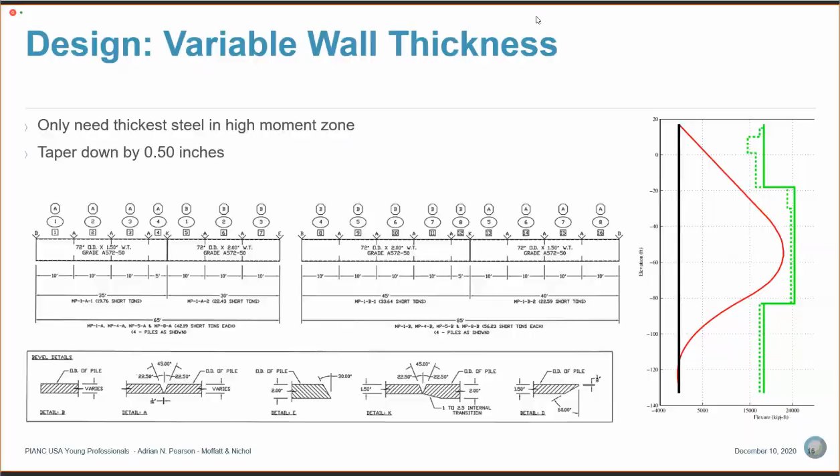It will be set up very similar to this, a little more technical. Right now we are tentatively planning on having Matthieu de Schipper from TU Delft talk about a project called Sand Motor. It's a mega nourishment beach project in the Netherlands, a way to passively work with nature to encourage beach nourishment and reduce coastal flooding. And with that, I'll pass it to Nicole to talk about getting involved.

I think I've got a photo of the hammer on the barge, gives you a better view, but I'm struggling to find it. Yeah, very large impact hammer. Very loud. But the pile's awesome. Actually, it's pretty soft clay at this location, and the pile settles quite a lot under its own weight until you have to start driving it.

How many of those did you end up installing for this project? Eight.

What was the contract or construction value? It was about $2.5 million total, for the monopiles, bollards, demolition, and some cleat repair and walkways. So about $2.5 million. $250,000 per monopile-ish? In that range, I'd need to look back at the bid tabs and we could catch up offline, but that's the rough order of magnitude for the project. Yeah, that's good to know.